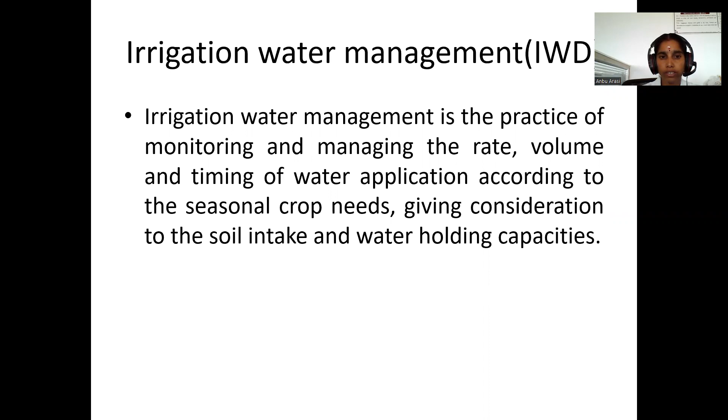Irrigation Engineering, Unit 5, Water Management in Irrigation. Irrigation water management is the practice of monitoring and managing the rate, volume, and timing of water application according to the seasonal crop needs, giving consideration to the soil intake and water holding capacities.

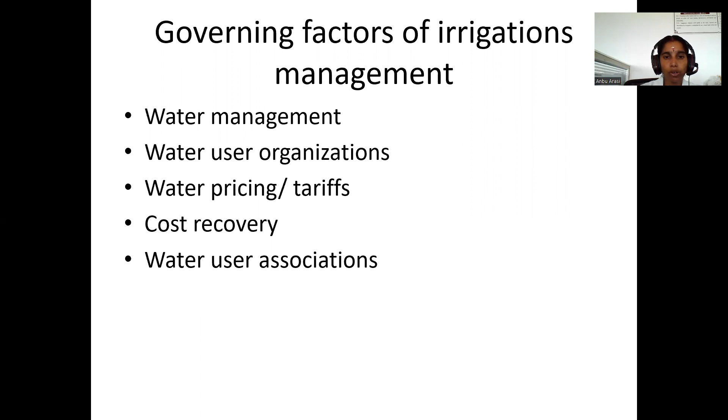Irrigation is the artificial exploitation and distribution of water at project level aiming at application of water at field level to agricultural crops in seasons. Governing factors of irrigation management: water management, water user organizations, water pricing, water cost recovery, water user associations.

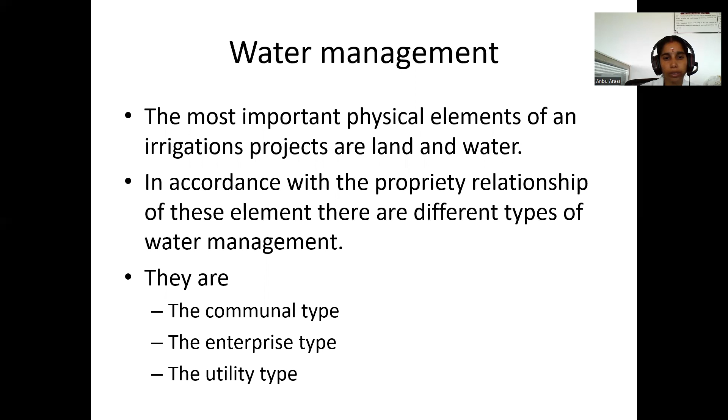The most important physical elements of an irrigation project are land and water. In accordance with the property relationship of these elements, there are different types of water management. They are communal type, enterprise type, and utility type. Communal type. The land was often private or assigned by the village authorities to male or female farmers, but the water resources were in the hands of clans or communities who managed the water resources cooperatively.

Enterprise type. The enterprise type of water management occurs with large landowners or agricultural corporations, but also in centralized societies. Both the land and water resources are in one hand. Utility type. The utility type of water management occurs in areas where the land is owned by many, but the exploitation and distribution of the water resources are managed by organizations.

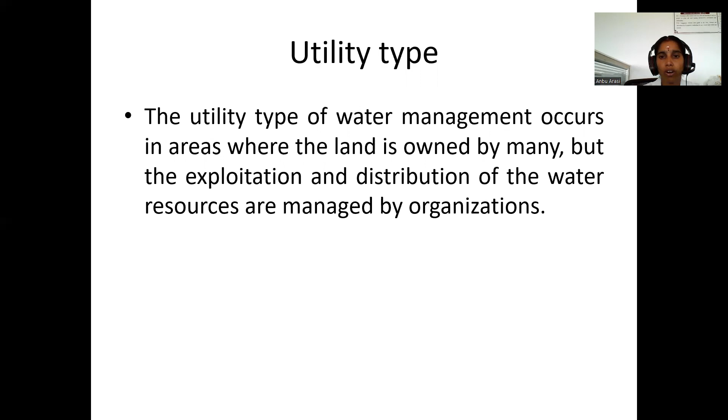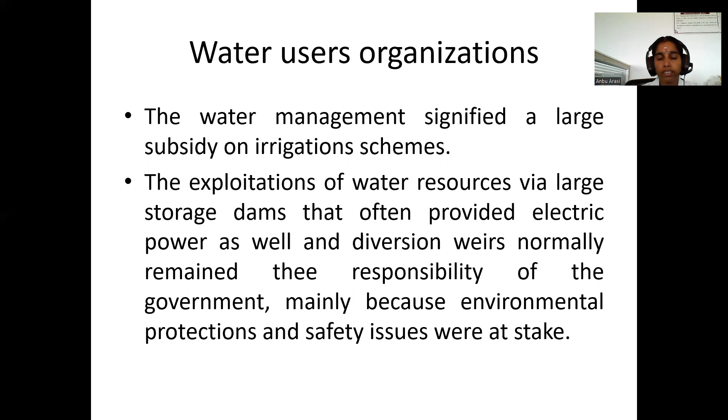Water Users Organization. The water management signifies a large subsidy on irrigation schemes. The exploitation of water resources via large storage dams that often provided electric power as well and diversion weirs normally remain the responsibility of the government, mainly because environmental protection and safety issues were at stake.

Water pricing or tariffs. Irrigation water has a price by which the management cost must be covered. No tariff: the government assumes the cost. Tariff in labor hours, which holds mainly in the communal type of management in traditional irrigation schemes. Yearly area tariff: a fixed price per hectare per year.

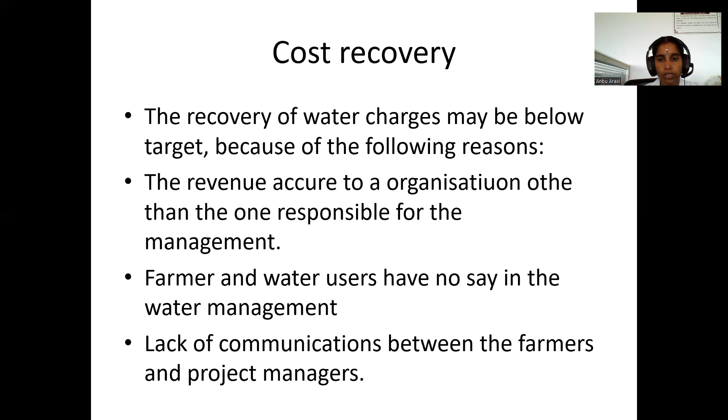Cost recovery. The recovery of water charges may be below target because of the following reasons. The revenue accrued to an organization other than the one responsible for the management. Farmers and water users have no say in the water management. Lack of communication between the farmers and project managers.

Water user associations. Water delivery principles: rotational, on demand, preferential right, protective duty. Water delivery practices. Pains and problems. Modernization techniques.

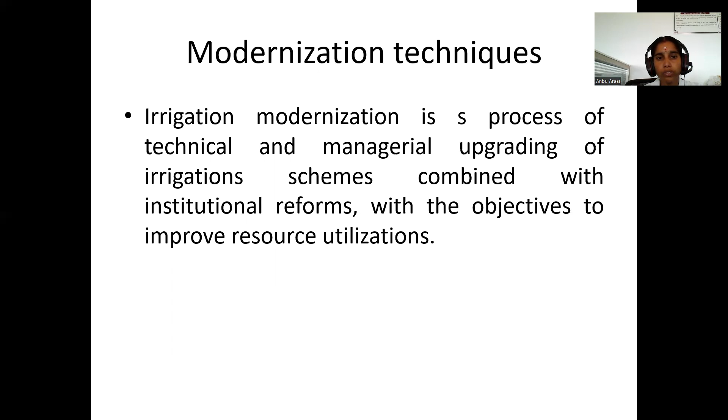Irrigation modernization is a process of technical and managerial upgrading of irrigation schemes combined with institutional reforms, with the objective to improve resource utilization. Objectives of modernization: increasing water productivity, increasing the cost effectiveness, increasing the reliability of irrigation deliveries, increasing the flexibility of deliveries, consideration of other uses of water, increased knowledge and human resources development.

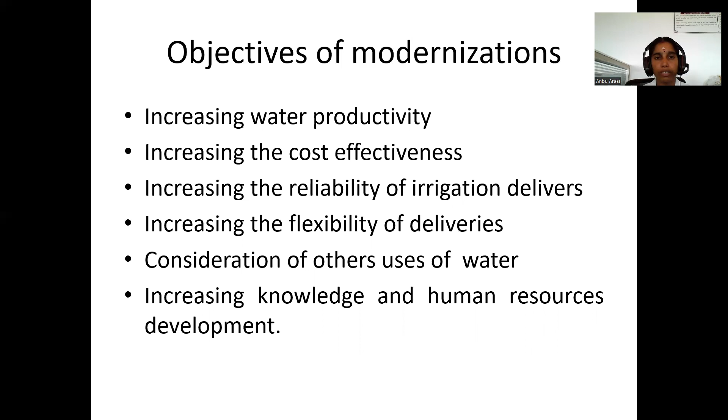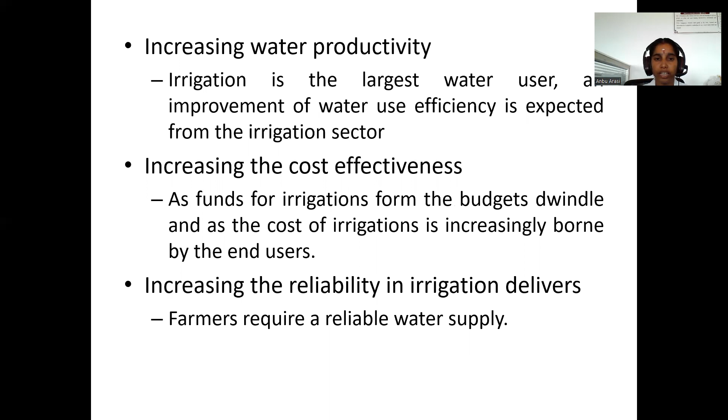Increasing water productivity. Irrigation is the largest water user and improvement of water use efficiency is expected from the irrigation sector. Increasing cost effectiveness. As funds for irrigation from the budgets dwindle, the cost of irrigation is increasingly borne by... Reliability in irrigation deliveries. Farmers require a reliable water supply. Increasing the flexibility of deliveries. Flexibility is an important property of irrigation deliveries. With a flexible service, users can intervene and supply water to crops whenever they think it is required.

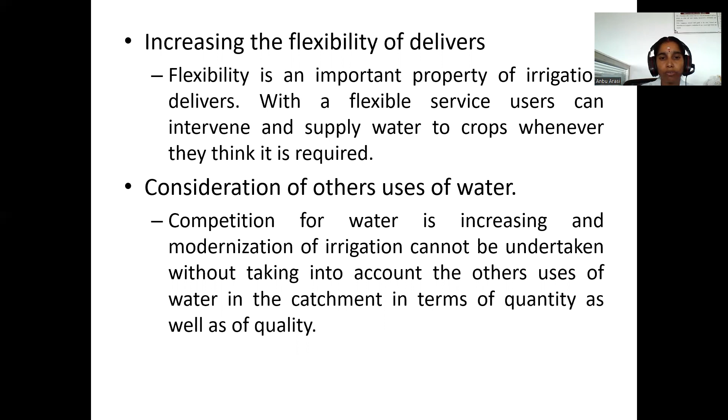Consideration of other uses of water. Competition for water is increasing and modernization of irrigation cannot be undertaken without taking into account the uses of water in the catchment in terms of quantity as well as quality.

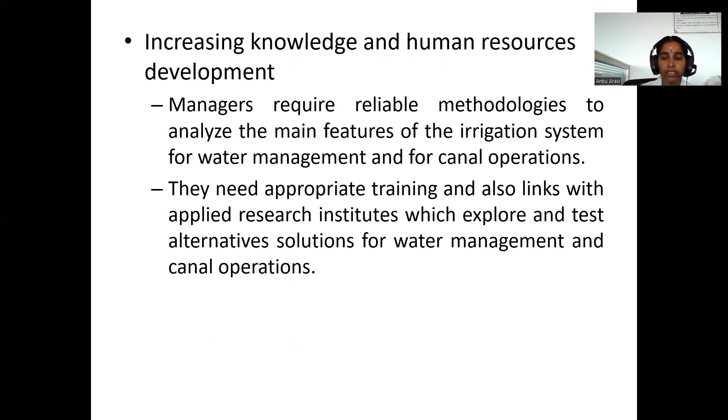Increasing knowledge and human resources development. Managers require reliable methodologies to analyze the main features of the irrigation system for water management and for canal operations. They need appropriate training and also links with applied research institutes which explore and test alternative solutions for water management and canal operations. Obstacles of modernization: technical gaps, financial constraints, social constraints, institutional constraints. These are all the obstacles of modernization.

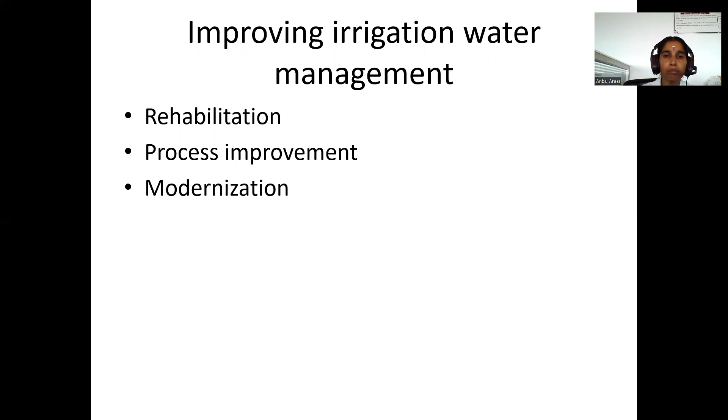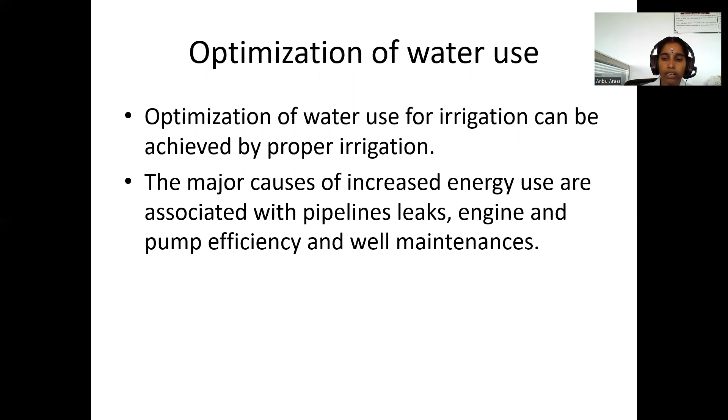Rehabilitation, process improvement, modernization, or improving irrigation water management methods. Optimization of water use for irrigation can be achieved with proper irrigation. The major causes of increased energy use are associated with pipeline leaks, engine and pump efficiency, and well maintenance. Optimization of water use, improving irrigation efficiency.

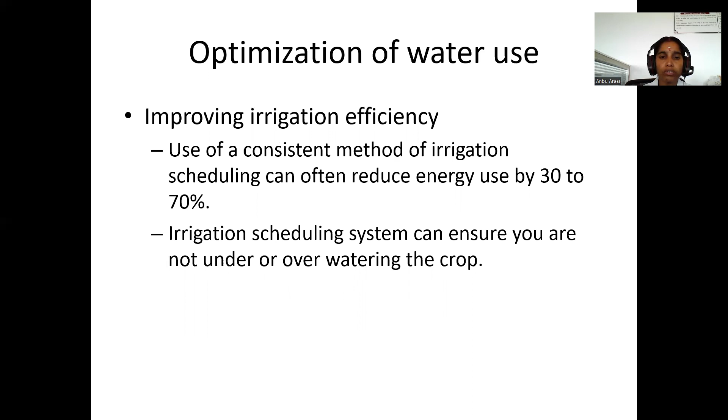Use of a consistent method of irrigation scheduling can often reduce energy use by 30 to 70%. An irrigation scheduling system can ensure you are not under or over watering the crop. Water application technology. A canal or pond may serve as the irrigation water supply, a means of transferring the water from the sources to the root zone.

Irrigation systems can be broadly characterized as being pressurized or non-pressurized. Pressurized systems are those in which water is delivered through a pipe under pressure and discharged by one of a variety of different outlet designs, including sprinkler heads and drip emitters. Non-pressurized systems are those in which water is delivered and allowed to flow across the field.

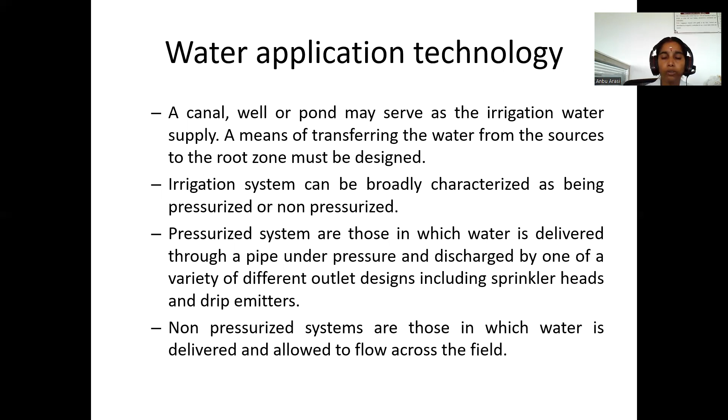Water use efficiency and water conservation. Water use efficiency and water conservation are commonly used terms applied to irrigated agriculture. Water use efficiency is calculated as a ratio of terms, which is then multiplied by 100 to report the efficiency as a percentage. A distinction between water use and water consumption is required to properly assess water conservation practices.

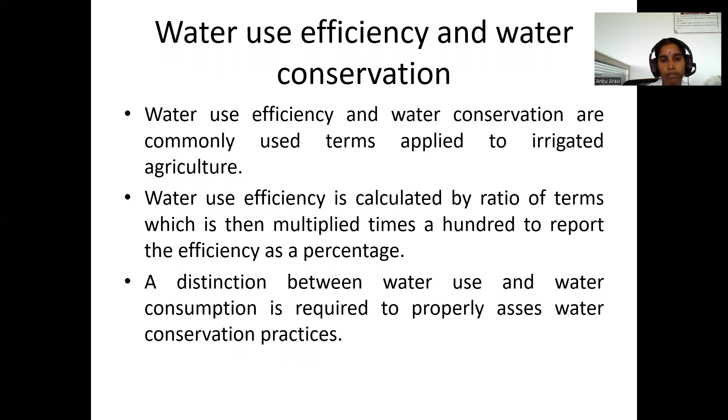Crop water production functions. Agricultural production is a business operation and irrigation management can be evaluated in the context of the business. One definition of optimal irrigation management is that management which maximizes profits. The runoff water has economic implications that must be accounted for separately.

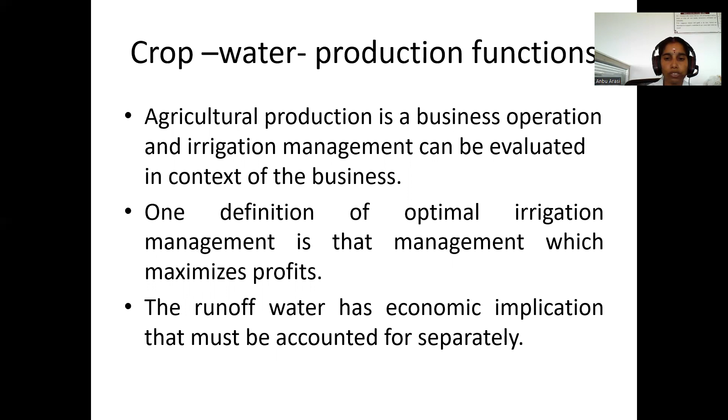Irrigation scheduling. Irrigation scheduling refers to the time, duration, and quantity of an irrigation. Although crop water production functions provide the scientific and economic basis for optimizing irrigation, farmers do not have such complete detailed information available to guide their irrigation management using crop water production functions. Traditionally, agricultural management concepts have been on achieving maximum yields. Crop production research was directed towards determining the treatment that provided maximum yield rather than establishing crop water production functions.

The leaching requirement concept was established for irrigation with saline waters. The leaching requirement is defined as the leaching that results in maximum yield. Using water for higher monetary value. Economists suggest that water should be used for its higher monetary value. Water marketing is proposed as an option for stimulating transfer of water from agricultural to urban uses or from lower value to higher value uses. Reducing seepage, leakage, and percolation losses in irrigation.

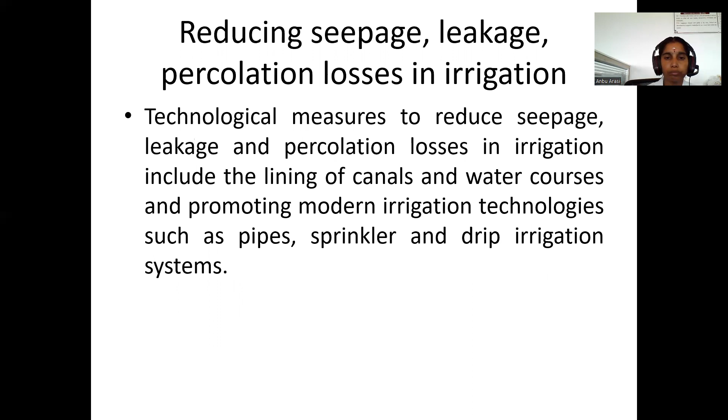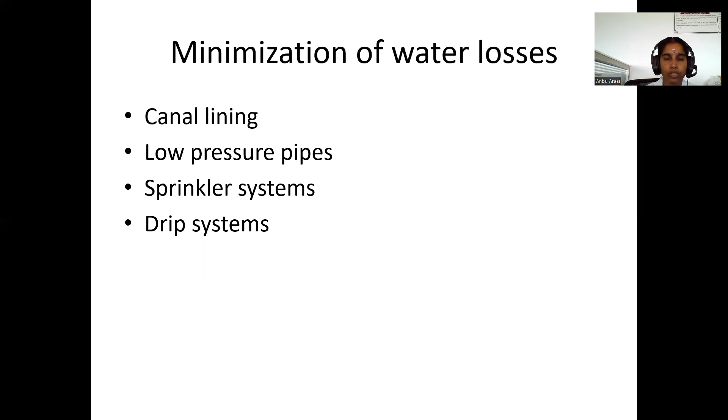Technological measures to reduce seepage, leakage, and percolation losses in irrigation include the lining of canals and water courses and promoting modern irrigation technologies such as pipes, sprinkler, and drip irrigation systems. Minimizing water losses by using canal lining, low pressure pipe, sprinkler systems, and drip systems. Methods of improving economic use of water for irrigation: unlimited water supply conditions, limited water supply conditions, growth stages of the crop.

Unlimited water supply conditions: conservation of water, enhancement of crop growth. Limited water supply conditions: deep soils that have moderately high water holding capacities, use of drought resistant crops. Growth stages of the crop: crops grown for seed or grain, vegetable crops, fruit trees, tree plant irrigation. Precipitation needs to be considered for crop water requirements. Cultural practices need to be modified.

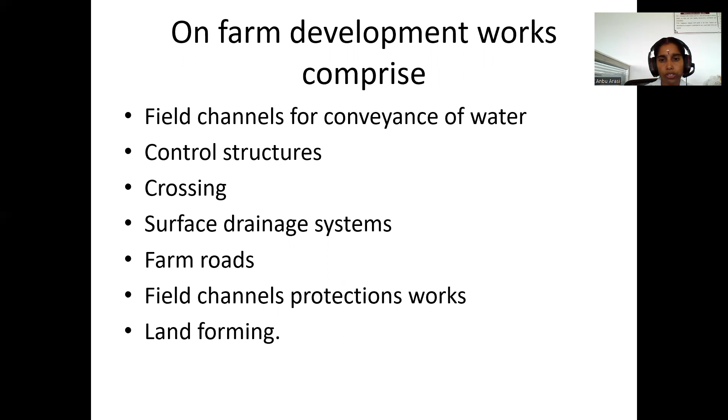On-farm development work. The maximum of agricultural production depends upon the efficient management of irrigation water. Efficient farm water management, optimization of water use and land use. Adopting the appropriate methods of water application. On-farm development works comprise field channels for conveyance of water, control structures, crossings, surface drainage system, farm roads, field channel protection works, and land forming.

Basic issues: general approach, systems approach, sequence of design and execution, functional utility, farmers' participation, organizational coordination, stages of on-farm development works. Part 1, cost estimates for water delivery system, field channel protection works, and surface drainage works. Part 2, cost estimates for land forming works for each holding.

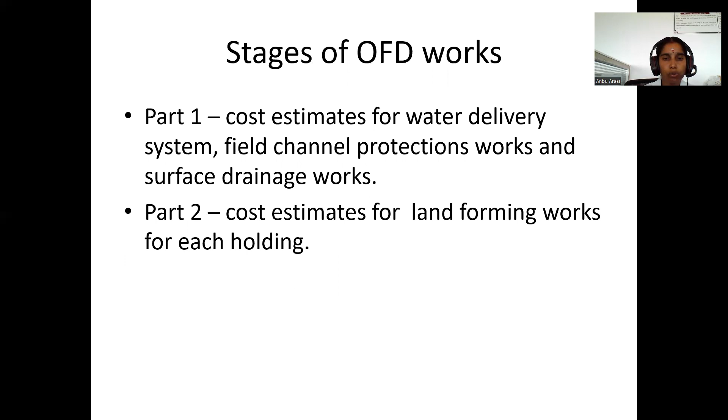Participatory irrigation management. PIM refers to involvement of farmers in project planning, development, and maintenance of irrigation schemes along with the government. Objectives of PIM: to create a sense of ownership of water resources and the irrigation system among the users so as to promote economy in water use and preservation of systems. To improve the service delivered through better operation and maintenance. To achieve optimum utilization of available resources through deliveries. To achieve equity in water distribution. To increase production per unit water where water is scarce. To increase production per unit of land where water is adequate.

Necessity of PIM. It is imperative to increase agricultural production to keep pace with the requirement. Increasing the existing reservoir capacity and taking up new projects is causing serious financial and social problems. There is severe budgetary competition at the government level among different sectors. The ratio of financial outlay for the irrigation sector to the total outlay is coming down year after year.